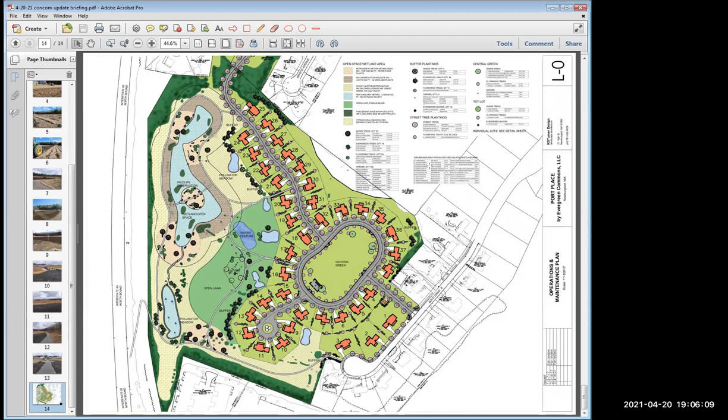Okay, thanks. Speaking of set agenda, let's move to certificates of compliance, requested determinations, etc. First item is Sylvester Electric, 11 63rd Street, request for determination. Is there anybody here for 11 63rd Street? Okay, Erica is here. And so I verified that fence has been there for at least 20 years. Okay, so we're past that.

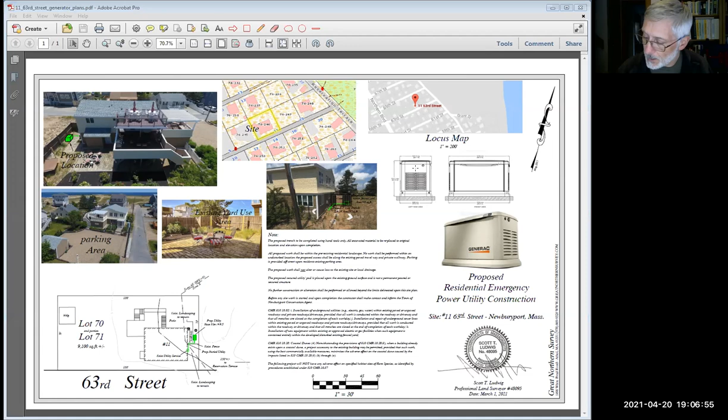And I think at the last meeting we discussed not doing any plantings within a couple feet of the generator so they didn't get burned up by the exhaust, and to have an 8 square foot mitigation planting area, probably in that general area as well as where all the gas and electrical lines are. So the customer actually wanted it in a different spot. We haven't been able to get a hold of Scott. He was in the hospital and we haven't heard back from him. So the customer wants it on the other side.

On the other side. So if you look, hold on, let me look at the pictures. I believe it's the picture. Well, maybe we need a submission of where exactly they're going to want it now, since what we have now is obsolete, right? So if you see the picture from the street view, where you can see the meter. Andy, do we have any? I was going to say, if there's not a plan, I'm checking through here to see what else we have. If there's not a clear plan showing the current or proposed conditions accurately, I would suggest a revision be submitted to incorporate in any approval or decisions.

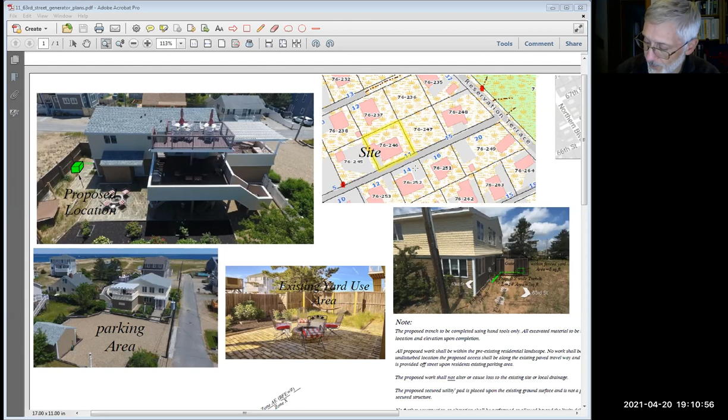Okay, so we can get those plans over to Julia. Yes, okay, and we'll get you on it. We'll do a continuance to the next meeting and we'll hopefully take care of it then. Yes, okay. You want a motion? Yes. So a motion to continue. Second. May 4th. Okay. Roll call.

Paul Healy, yes. Steve Moore, yes. Dan Warshaw, yes. David Vine, yes. Ron DeCola, yes. Carol Wagon, yes. And I vote yes. All right. Thank you, Erica. Thank you.

Okay, next item is Terry and Mark Robertson, 1 Jefferson Court, request for certificate of compliance. Good evening. Tom Hughes with Hughes Environmental Consulting. This is really straightforward. This is the lot on 1 Jefferson Court. It's the one that is across the river from Jefferson Court. I don't know if you remember, it was a renovation of a house, additions, and some landscape work. All of the work's been complete.

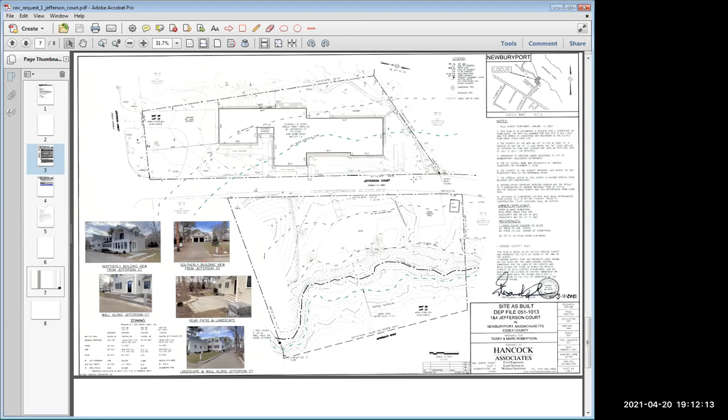There's a letter on the file from Hancock Associates stating that everything was done in compliance with the project and everything on the ground looks good. So we're asking for a COC. Okay. Anybody got any questions? I do not. No. Get a motion? Motion to issue a certificate of compliance? Second. All right, roll call.

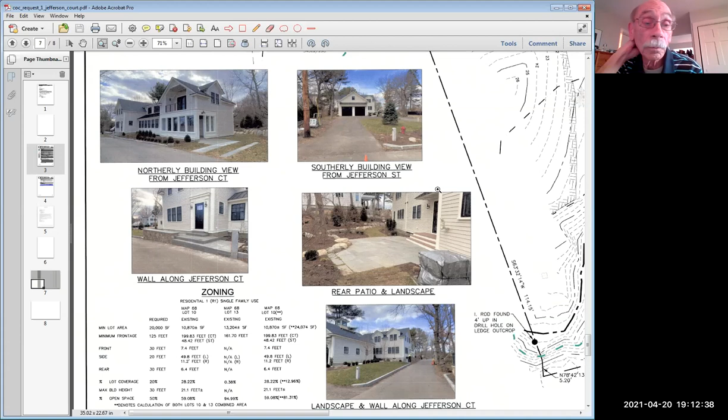Paul Healy, yes. Steve Moore, yes. Dan Warshaw, yes. David Vine, yes. Ron DeCola, yes. Carol Wagon, yes. And I vote yes. Thank you. Thank you.

All right, can I get a motion to open the public hearings? So moved. All in favor? Aye. Aye. Opposed? Okay. All right, first item is Robert Condon, 11 76th Street, notice of intent. Tom, can you give us a... Yeah. So let me, hold on a second, if you don't mind. I'm going to change my screen so I can go over my markup of the plan.

So the surveyor, Everett Chandler, is working on the plan update. I just don't have it in time for tonight. But shortly after the hearing we had last time, I coordinated with the applicant and we got answers to all the unanswered questions. So we are looking in the front of the house. You may recall there were the granite posts that were there originally, and they had temporarily put like a marine rope between them, and they're looking to keep that. In the back of the house, they're looking at just doing posts with rabbit wire. So that's like 90-something% open, just to keep the dog in.

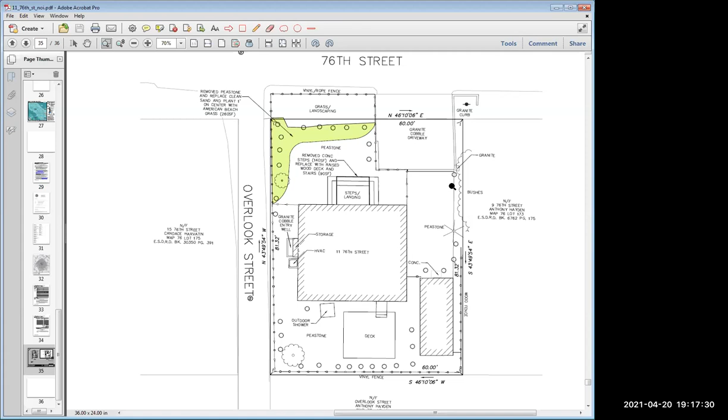Tom, this is Andy. Could you, for the commission's benefit, regardless of whether they're taking action tonight, for the purposes of referencing plans and approving plans, if it sounds like there needs to be plans submitted that show accurate conditions, right? But also, Julie and I discussed the titles of these 2 diagrams that are shown here. It's a little bit confusing. It says compiled conditions. I assume that that's supposed to be existing conditions.

Well, no, so a compiled condition plan is when you can't survey it. So they did all this work after, without any survey done. So what we did is we did ground survey and compiled the conditions using a ton of aerial photographs and ground photographs. So it's a compiled condition, rather it could also be called pre-existing condition. Yeah, I guess that's what I'm suggesting, is that be clarified as the title of that diagram. Yeah, so I think we'll change that to compiled pre-existing, because the surveyors seem to refer to them as a compiled plan. But I get how that's confusing. So it'll be compiled pre-existing conditions.

And actually, the one on the right should not be survey. I assume it should be proposed. There should be a plan showing proposed. Right. No, and that's right. So the plan on the right is based on current conditions with proposed changes on it. So we'll change those titles. That's a good point, Andy.

If you look on the left-hand panel, though, you can see where that deck was. That was there, and it didn't have 2 foot clear. It was non-compliant. As part of the violations, they took that out. So we'll just go with a reasonable size landing with stairs coming out of it. And then that clamshell patio will be shown on the next plan. So we will update those titles. Everett was possibly going to get me the plan today. It just didn't happen. So I should have that by the end of the week, or certainly early next week.

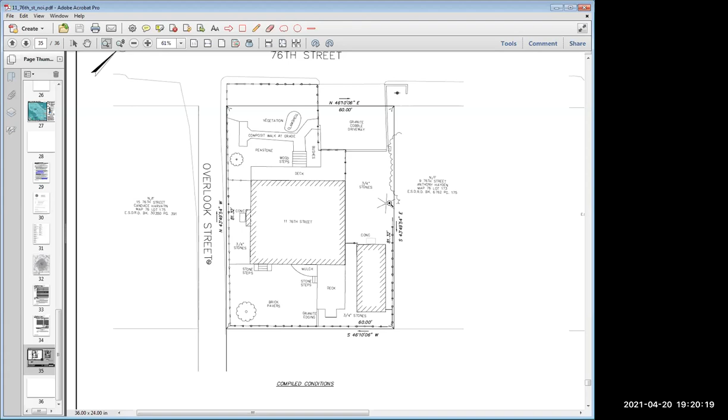Alright. So with that, unless there's any further comments or questions, I would request a continuance to our next meeting. All right. Hearing none, can I get a motion? Motion to continue to May 4th. Second. All right, roll call. Paul Healy, yes. Steve Moore, yes. Dan Warshaw, yes. David Vine, yes. Ron DeCola, yes. Carol Wagon, yes. And I vote yes. All right, thank you very much. Have a good night, guys.

Okay. All right. Can I get a motion to close the public hearings? So moved. Second. All in favor? Aye. Aye. Opposed? Okay.

So we forget about enforcements and violations right now. One thing I would, actually it's related to enforcement and violations. I would like to organize a site visit out to the Gloria Brownhart Bike Trail, the old I-95 roadbed, to look at things that have gone on out there, including the dumping of soil on the roadbed, and tree cutting and other things that have gone on. I think the commission should take a look out there, just to see what Jerry Mullins has been working on.

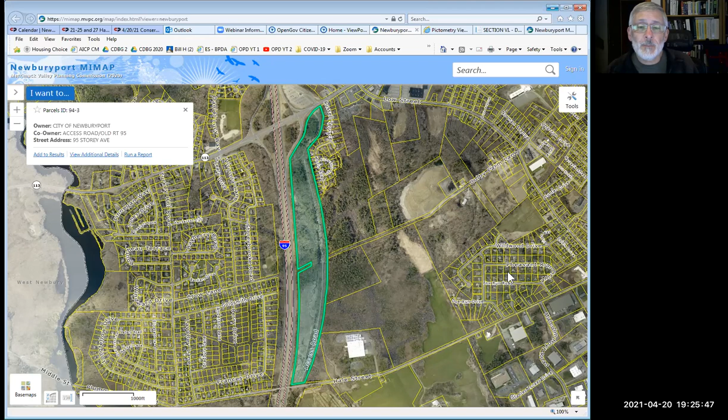Yeah, for those who are new, we can send out all the emails we want on coordinating times like for site visits, so we'll figure that out. And we'll get out there and see what's going on, because he has transferred a rather significant amount of dirt to the roadbed and has dug up a rather significant amount of that dirt from the surrounding area, including within a 25-foot no disturb, and really on the banks of the little river that goes through there too. Do we know why he's doing this? Yes, he was trying to narrow the roadbed to a standard bike path width. Apparently, all he really needed was to have lines painted on the roadway, but he decided to do it this way, and he's done a lot of it.

So, Joe, for background purposes, can you just tell me who Jerry is? Jerry is currently the president of Parker River Clean Water Association. He's really done yeoman's work on the trail system out there in the woods and everything. He's done a lot of maintenance, but he's also done a bunch of things such as putting bridges over the little river that he should not have done, unpermitted bridges where one of the footings was right in the middle of the stream. And he's been pretty intransigent about removing stuff too. So he's done some tree cutting out there, and his position in that group, he's currently the president, and he can go in and do this stuff.

This is Andy. Can I clarify? Yes, please. So we're having discussions right now because this is a sort of orphaned open space area in the city. We're in discussions about having the path or the trail formally placed underneath the Parks Commission, and then coordinating issues like this through the Conservation Commission. Because there hasn't been any city agency or monies put towards that area, Jerry and his folks have taken on efforts to try to improve the trail network over there.

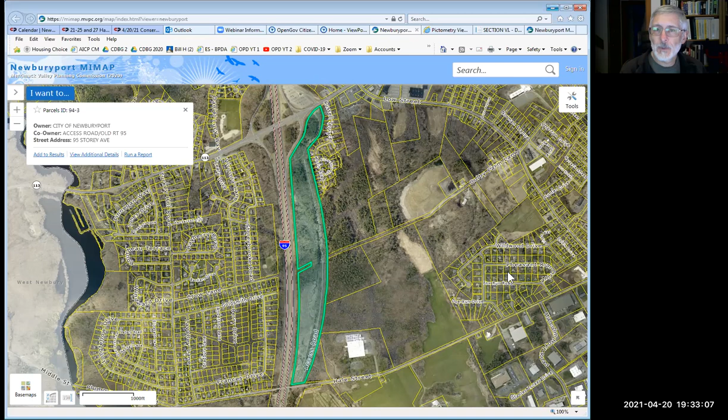Motion to adjourn. Second. All in favor? Aye. Opposed? All right.